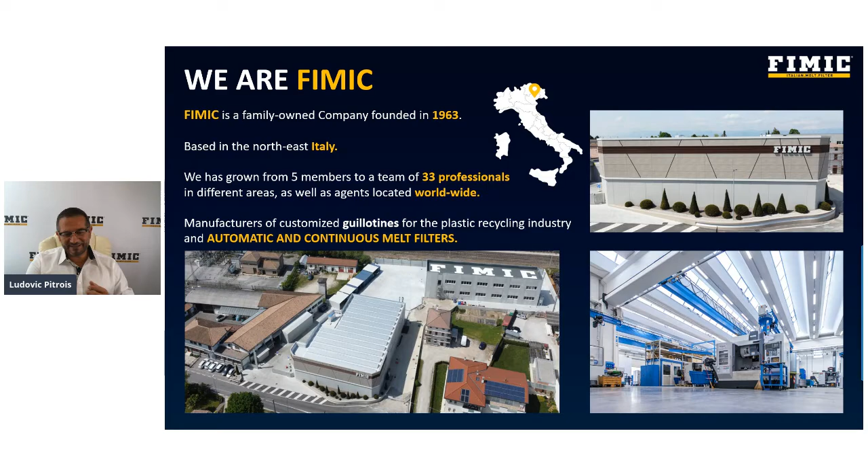Fimic is a family-owned company based in the suburb of Venice, Italy. Since 1963, Fimic has been dedicating its effort, research, and results to the plastic recycling industry. Our main products are automatic continuous melt filters and guillotines. Today, we have more than 370 units running worldwide. Many units are running at the leading players in the plastic recycling industry. And today, we are very excited as we will share a premier Fimic product to the world.

We are Fimic. What does that mean? We are people, a company dedicated to serve the plastic recycling industry. We have a team of 33 professionals, as well as agents in multiple countries to offer closer support to our customers. Fimic grew 700% in the past 6 years.

Plastic recycling has become a very hot topic in recent years. Fimic has dedicated its business to plastic recycling. Our philosophy is to create the equipment which helps plastic recyclers to easily upgrade the performance of existing or new recycling lines and to dramatically reduce the operational cost. This short video will help you better understand Fimic's line of work. Let me play.

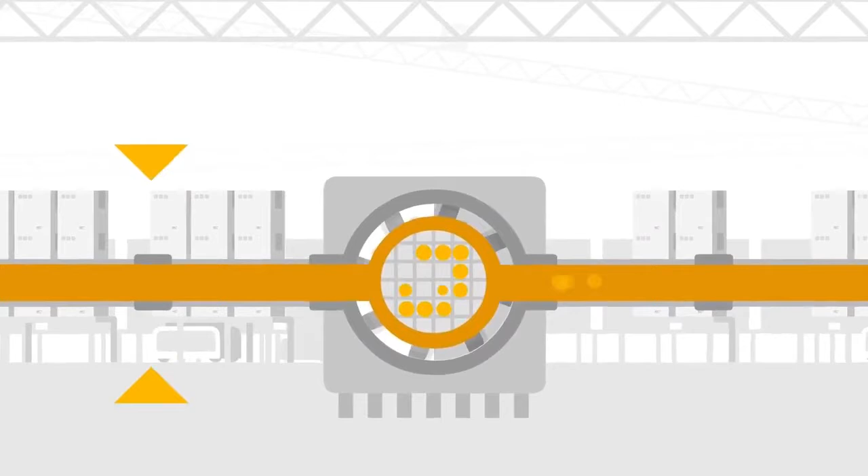Does your company recycle plastics? The European directive is clear. From 2025, plastic products must contain at least 25% recycled material. This is a very high percentage, and it is difficult to achieve, at least with manual or semi-automatic filters. However, it is not a problem. In fact, it represents a great business opportunity if you choose to rely on Fimic, a company specializing in the production of automatic and self-cleaning melt filters specifically dedicated to post-industrial and post-consumer plastics recycling. Its filtration technologies, one of a kind, guarantee high results and a very high quality of the final material.

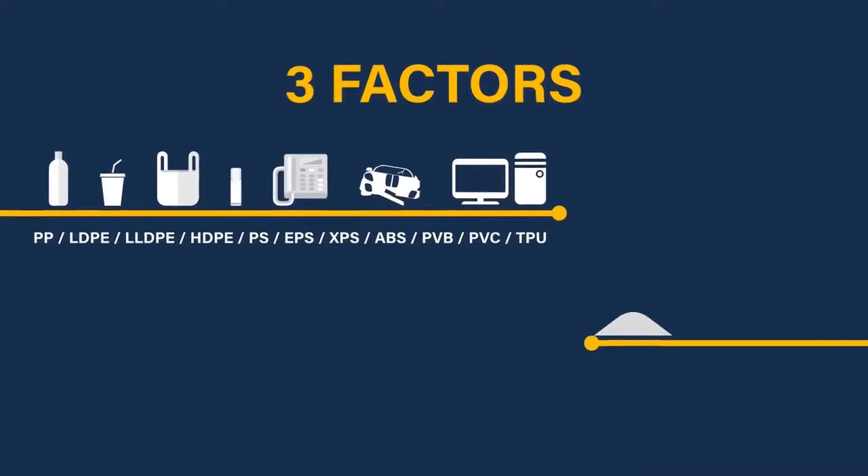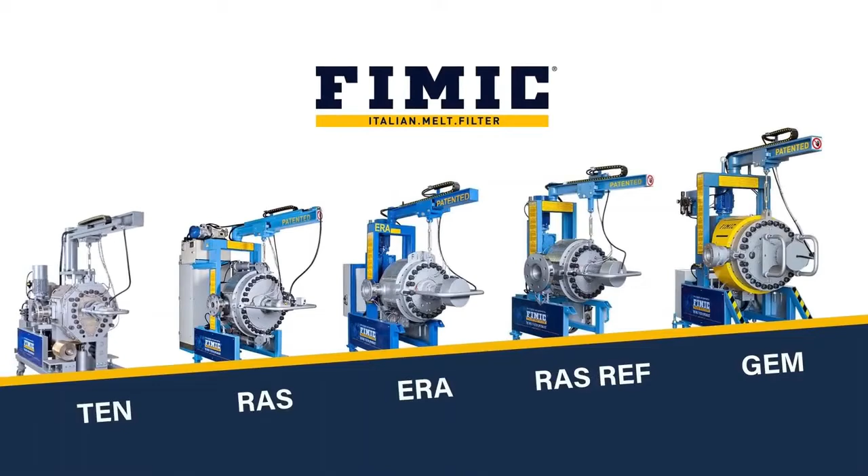They are also available in different models and sizes, based on factors: type of material to be recycled, required output per hour, contamination level and filtration requirements. These days, the amount of material to be recycled is ever increasing. At the same time, it is necessary to maintain high standards for high quality results. To do so, Fimic adapts the technology to the customer's needs with 5 different screen changers, offers all possible filtrations, and covers the many different existing applications. Would you like to test your materials at Fimic? Book a test in our technical center.

So, after this nice short animation video, I would like to talk more about our technology. Fimic's most famous technology is dedicated to automatic and continuous filtration. We are the only company which provides any type of automatic filters targeting post-industrial and post-consumer plastics. In total, we have a range of 5 different models, from materials with low contamination up to very high or aggressive contamination levels, from smaller output, 660 pounds per hour, up to 13,200 pounds per hour.

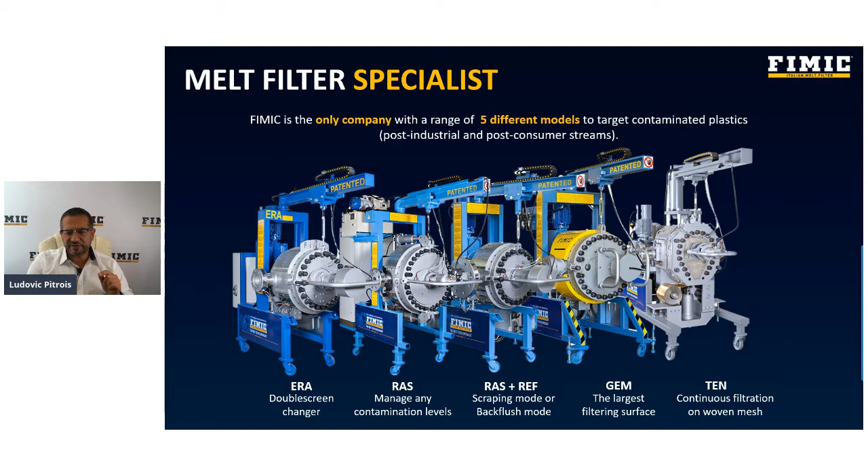Depending, of course, on the material, throughput, and required filtration that our customer needs, we will provide the most suitable filter solution accordingly. Last but not least, our technology is the only continuous scraping system also applicable to PVC recycling.

For the automatic filter, our philosophy is to provide the right type and size of filter, considering our customers' technical specifications. We can work with all different types of materials and contaminations, and our filter can be installed on any extruder types and brands, existing or new.

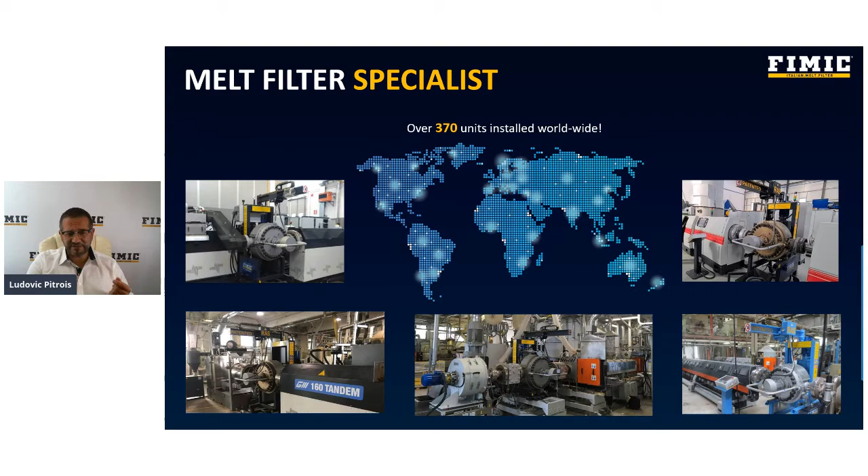We offer many years of experience and can provide customers excellent know-how based on real facts and experience, not only theories. And in addition to our popular automatic filter, to improve plastic recycling, we are proud to introduce our new innovation today. It is a revolutionary, innovative technology, a real breakthrough solution for the plastic recycling process.

Let me introduce you to the SPA screw pump. SPA means screw pump automatic. It is designed for 2 main purposes. First, it is designed for plastic recyclers and compounders who want to optimize the output performance of their extruders. Second, in case a recycler or compounder needs 2-step filtration, the SPA will transport the material from the first

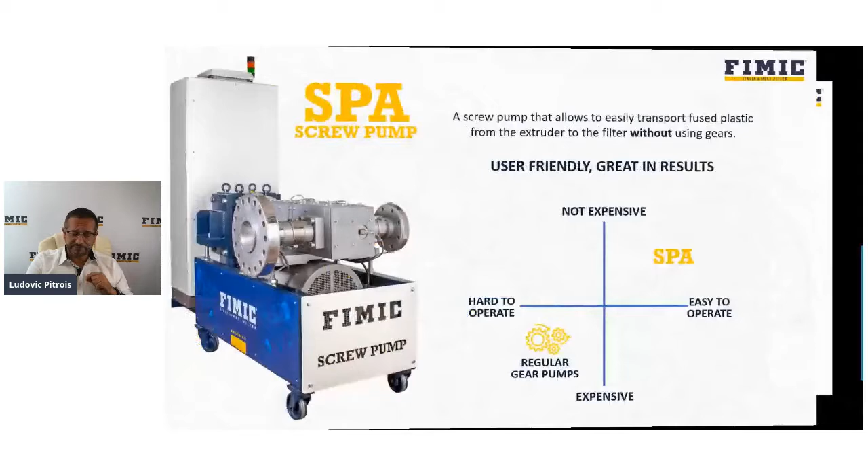filter to the second. The SPA screw pump is, in a few words, a melt pump used for the plastic recycling process. The SPA screw pump allows you to easily transport plastic melt from the extruder to the filter or between 2 filters without using gears. It is user-friendly and gives great results.

Very briefly, the advantages of the Fimic screw pump are shown here on this chart. Compared to conventional gear pumps, the maintenance cost of the screw pump is very low, as well as the ease of operation, which is fundamental to consider in a recycling line or compounding line using recycled plastic. Being more sensitive to contamination, a gear pump often needs a manual slide plate filter installed before it to protect

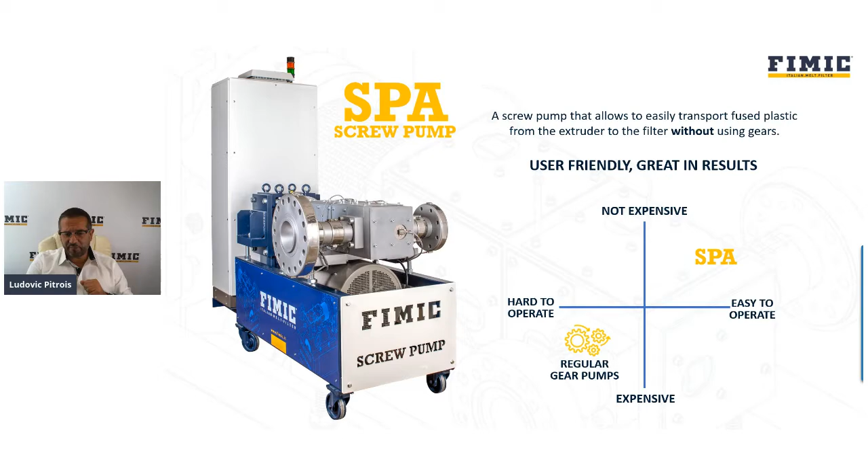it. Fimic SPA uses the screw to transport the melt. The screw is less sensitive than gears, so it doesn't need any additional filter before it to protect it. That is why its best performance comes out when using recycled plastic, especially post-consumer. So once again, the overall operation costs for a screw pump are much lower compared to gear pumps.

Regular gear pumps are complex to operate, while the SPA is easy to use and does not require periodic replacement by the operators. It can be installed before and/or after the filter and will be perfect for applications requiring a double filtration step or for compounding lines, typically on twin screws, to help build up enough pressure to the filter.

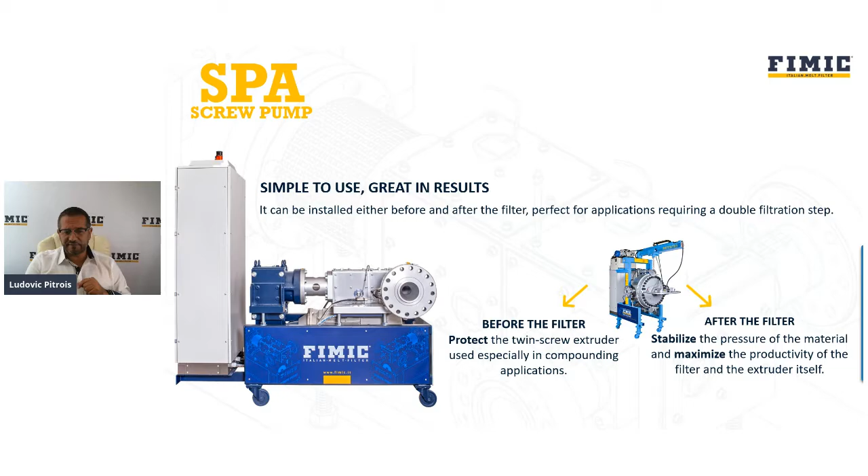There are two main applications for the Fimic SPA screw pump. Before the filter, typically on twin screw extruders, to build up enough pressure to the filter without the risk of damaging gears or replacing them too often. Or after the filter, either in between two melt filters or to stabilize the pressure of the material and maximize the productivity of the filter and consequently of the extruder itself.

To sum up the advantages of the SPA screw pump for plastic recycling: ease of operation. The screw's lifetime is much longer compared to gears. Additionally, it's easy to replace. The touchscreen has 3 operation modes, easy to change and test depending on the material and its characteristics.

Extremely low maintenance requirements, significant savings even in the short term, longer lifetime of wear parts, taking into consideration that recycling always has contamination that will damage gears during operation, which will need to be replaced multiple times. This will not happen with the SPA screw pump.

Optimization of the extrusion performance. The screw pump can reduce the pressure from the extruder, hence bringing the extruder's output to its maximum, whether it's installed before or after the filter.

This next animation will show you 2 different configurations. First, the screw pump is installed between 2 filters. Depending on the material, our customers need a second filtration if the plastic recycling process requires it. They are using the screw pump to transport the plastic melt into the second filter and optimize the extruder's output by reducing the outlet pressure of the first filter.

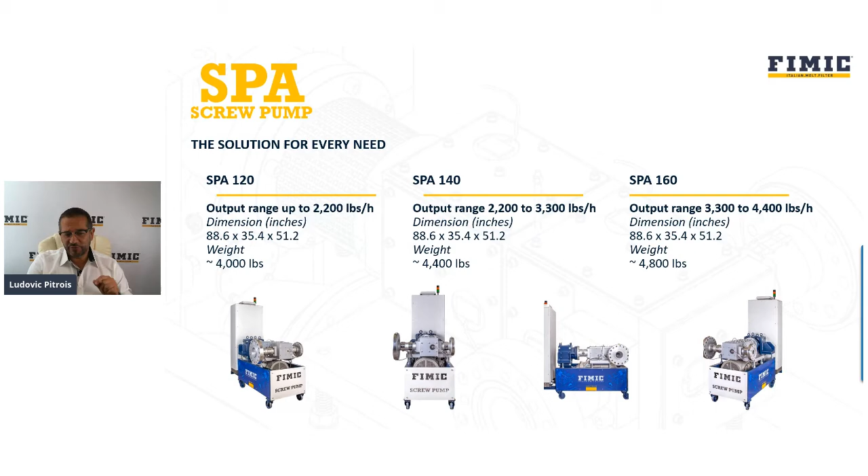However, we also understand that many of you are working with higher output, so our R&D is already working on designing a larger one to reach higher throughput requirements. Now, I will share with you a successful installation case involving the SPA screw pump. You will be able to see a real example of customer lines equipped with a Fimic melt filter and a screw pump.

The first was installed on a twin screw recycling line equipped with a SPA 140 for an output of 2,200 up to 3,300 pounds per hour, right before a Fimic TEN filter. This is a single-step filtration. The TEN filter produced by Fimic is using the continuous belt type screen. The TEN filter is normally used for filtration of low contaminated plastic, less than 1% contamination.

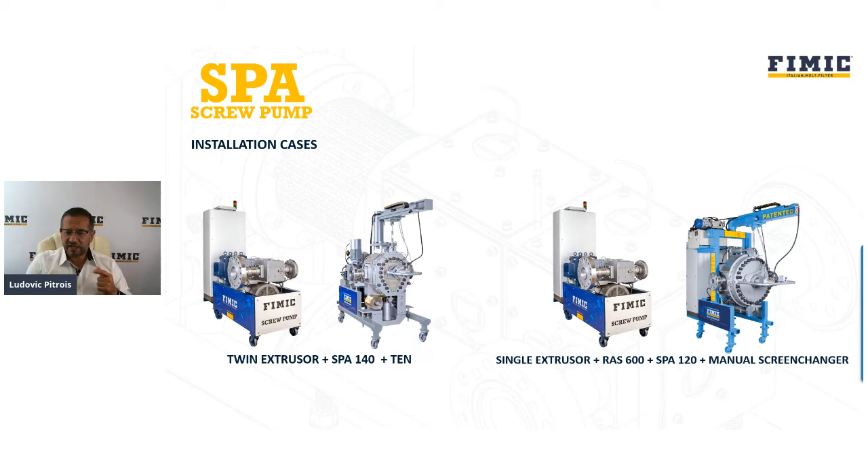The second case is a single extruder equipped with a Fimic RAS 600 melt filter, a SPA 120, output up to 2,200 pounds per hour, and followed by a manual slide plate type screen changer as a second filtration step. This project involved washed post-consumer PP regrinds, mainly from battery automotive application.

We got a co-rotating twin screw extruder, followed by a Fimic SPA 140 screw pump and a Fimic TEN filter, which is using a continuous woven mesh belt screen. The output for this line is 2,200 up to 3,300 pounds per hour, as I mentioned.

Usually, a twin screw extruder has pressure limitations, and the most common issues will be the melt return from degassing ports. Installing the new screw pumps helps decrease the pressure of the extruder and avoid melt returning back out of the degassing zone. We can find the configuration in the picture shown below. It is a twin screw extruder, Fimic screw pump, and a Fimic TEN filter. As you can see, no need for pre-filtration before the screw pump.

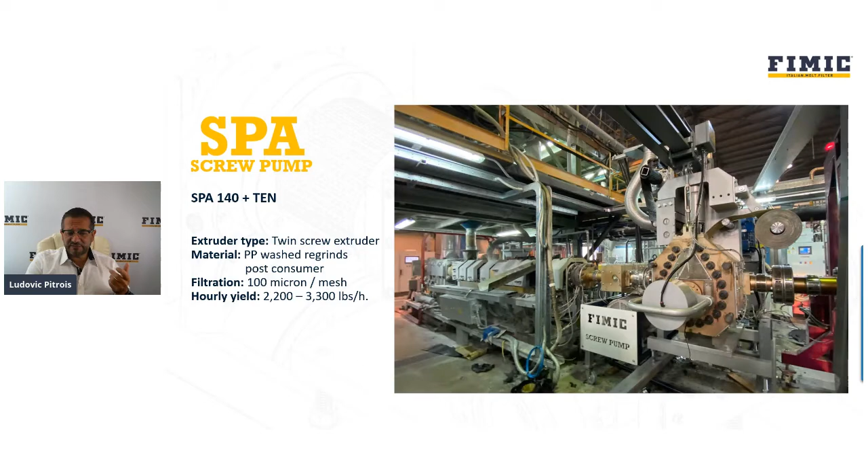Conventional gear pumps need a pre-filter with 400 and maybe 500 micron screen to protect its gears from contamination. And this pre-filter must be changed once every 20 to 30 minutes and potentially more often depending on the type of contamination. But Fimic screw pump doesn't need a pre-filter, which means less investments, less power consumption, less manpower, and ease of operation.

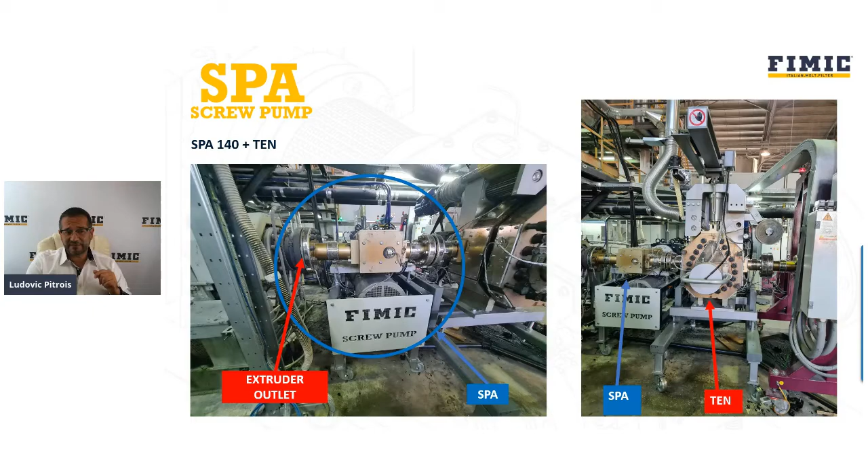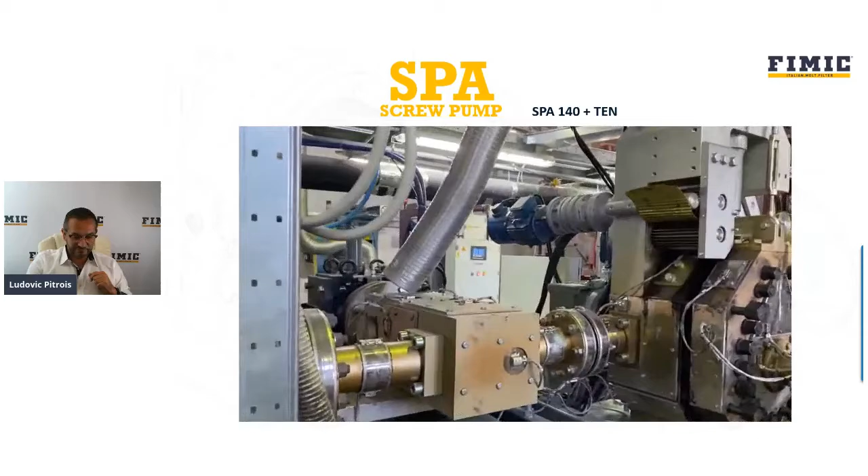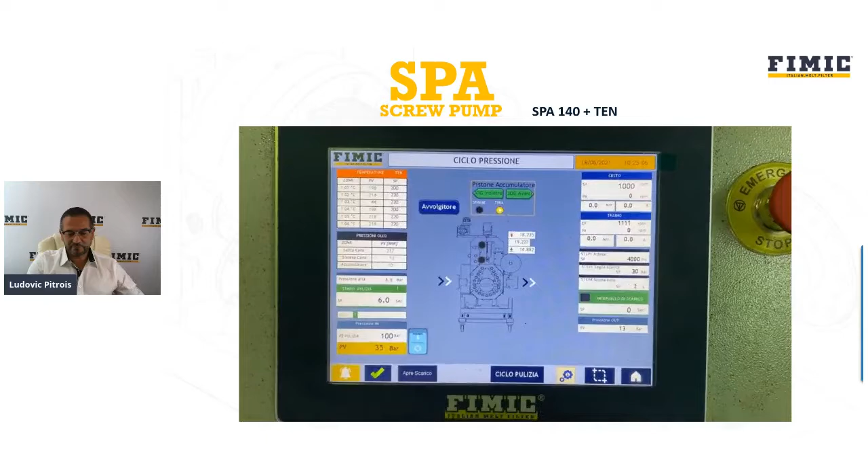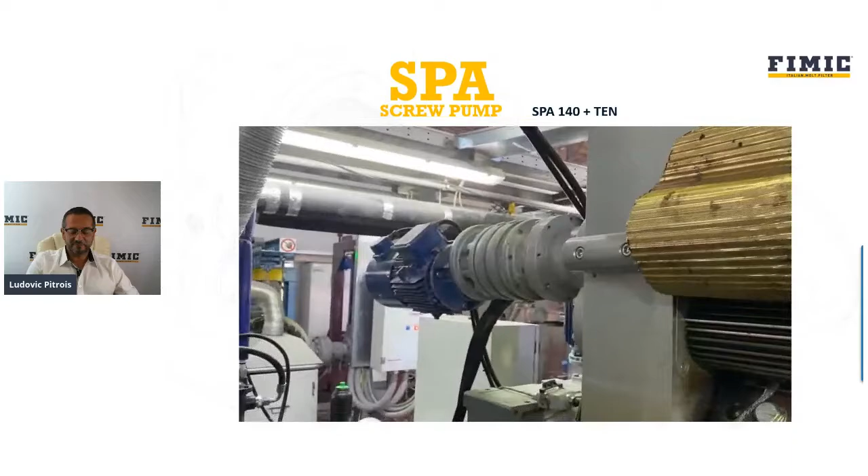Let's have a quick look at the equipment running on site. Here is the SPA. This is the TEN filter. And of course, this is the final result with the pellets.

The second installation case is dedicated to washed post-consumer LDPE films. As this customer's target was to reduce gel formation in the output pellets, we proposed to install a screw pump and a manual filter after the Fimic RAS 600. The machine configuration is a single screw extruder, first stage filtration RAS 600, and then the screw pump SPA 120, and after the screw pump, a manual side plate melt filter.

The first stage filter RAS 600 has a filtration of 120 micron on laser screen. Second manual filter is filtering at 100 micron on mesh screen. The SPA screw pump here is used between two filters to transport the melt from the first filter to the second filter with an excellent pressure control. The output for this line is 1,980 up to 2,420 pounds per hour.

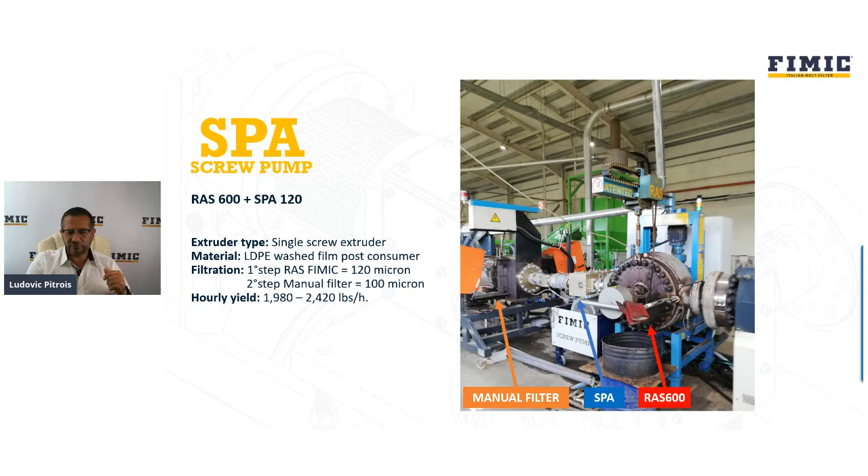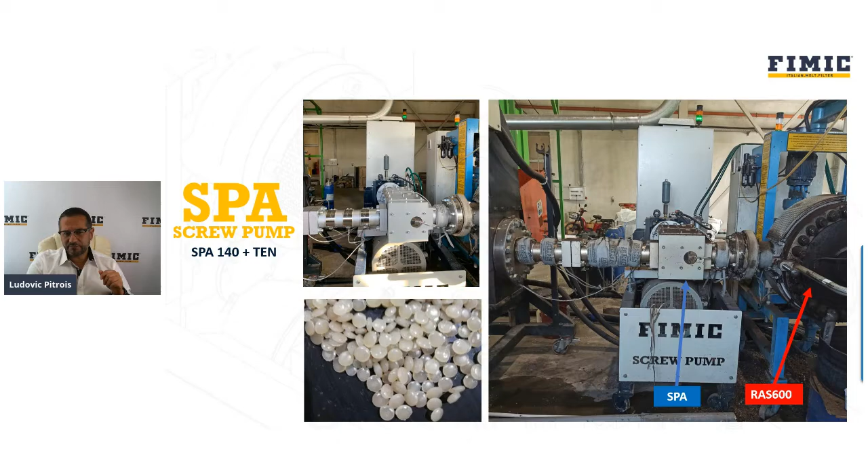Here are some more details of this installation. At the top right-hand side, you may see the SPA screw pump, installed after the RAS 600 filter. Here's another operation video that you can see from the customer side.

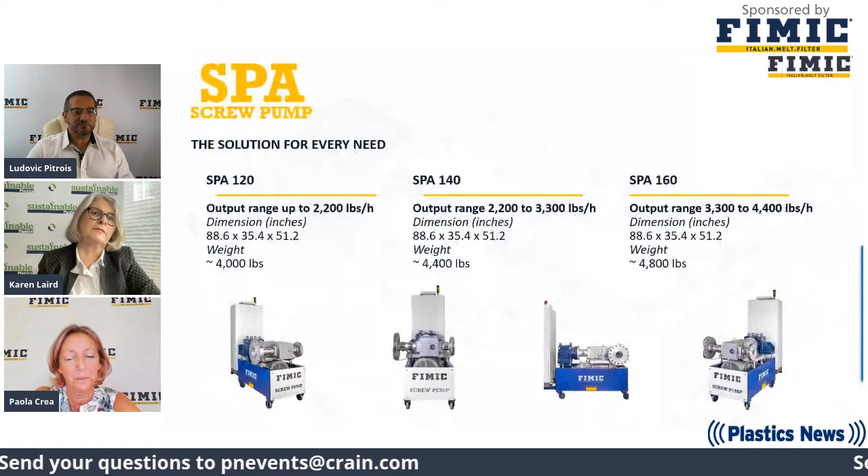Okay. And could you just very briefly, once again, go back to the Fimic SPA and sum up the differences compared to a conventional melt pump? Let me go back actually to the slide. I don't know if you're going to be able to see it. Okay, cool. Do you see the slide? Here we go. Perfect. Yes.

Okay. So again, to sum up the advantages of the SPA: very easy to operate. The screw lifetime is much longer compared to gears, and we explained why. Additionally, it's very easy to replace if it has to be replaced. We have on the touchscreen 3 different operation modes, easy to change and test. And again, we can set different types of material for that particular SPA. Extremely low maintenance requirements, and significant savings in the short term.

Longer lifetime for every part, taking into consideration that recycling always has contamination that will damage the gears. And these gears will have to be replaced, sometimes multiple times. And if I can add something. Go ahead. The gear pump maintenance is very complicated. The maintenance is due because the gears are worn. So to access the gears, you have to take the machine out of the line, and then you have to open the machine completely and check every single gear. So it's a complicated and long operation.

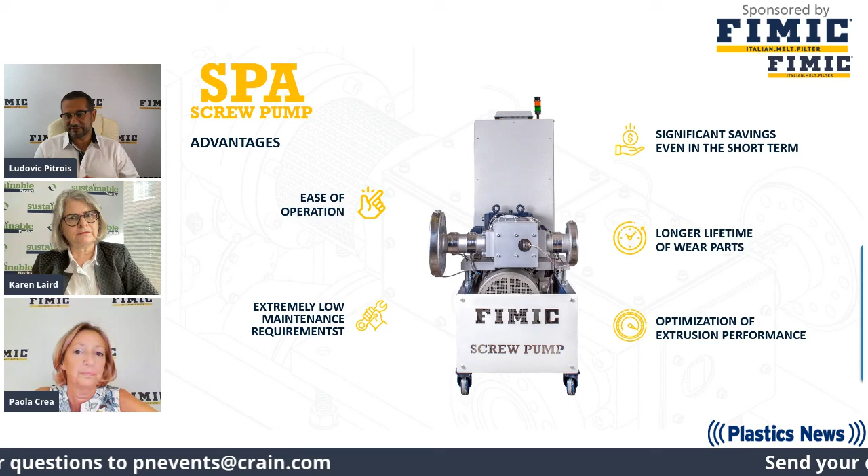In our case, the screw is easy to take out. I'm saying easy, but it will take like half a day, basically. And you don't need to take the machine out of the line, which makes a great difference. Okay, so less business disruption, a lot more convenience. Much more convenient, definitely. And of course, we cannot forget the optimization of the extrusion performance. That's one of the main things as well. Absolutely.